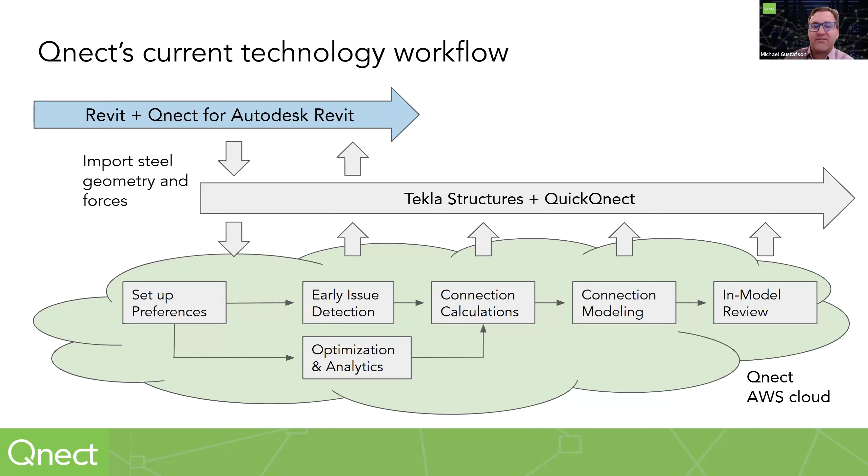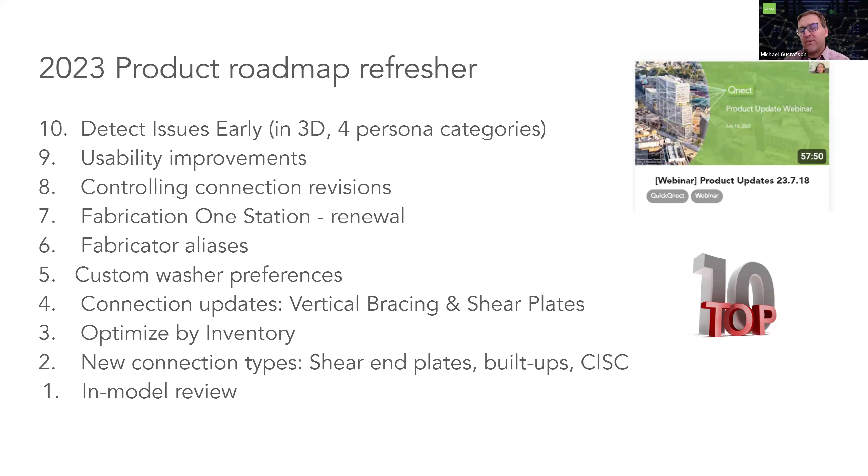A year ago, we talked about a top 10 list of progress. That was for the 2023 progress. If you don't remember or missed that session, we have that webinar up on our new video library for you to check out. I think it's always good to look at where we've been coming from holistically when you get these product updates.

One big theme that we've been focusing on, before we dive into the details of 2024, is balancing between standardization and customization. This is something we've heard from customers over the years. When QuickQnect started off first for Tekla users, there were a lot of perceptions, and probably some reality, around a lot of customization, but maybe not as much power to do standardization.

So today you'll be hearing about standard part tables or our mandated connections, estimating parts, new column optimization of doublers and stiffeners, and all those capabilities, how that helps framing and connections being optimized more holistically.

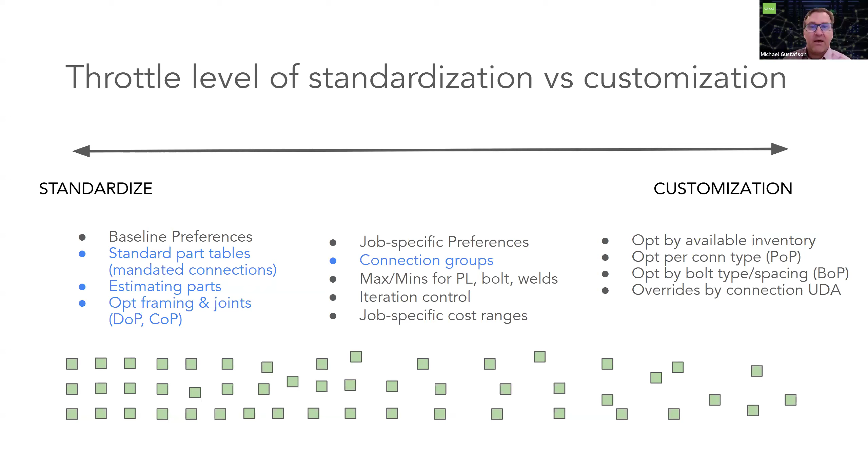And then on that middle one here, connection groups, this is really a very fundamental aspect I wanted to just double click on: the way that we're classifying connection groups, right? And this impacts how many connection types or groups you have. We're looking at two different levels of classification, both the framing condition, the types, and the framing format. That means related to the forces, and then also looking at the secondary-main and connection data.

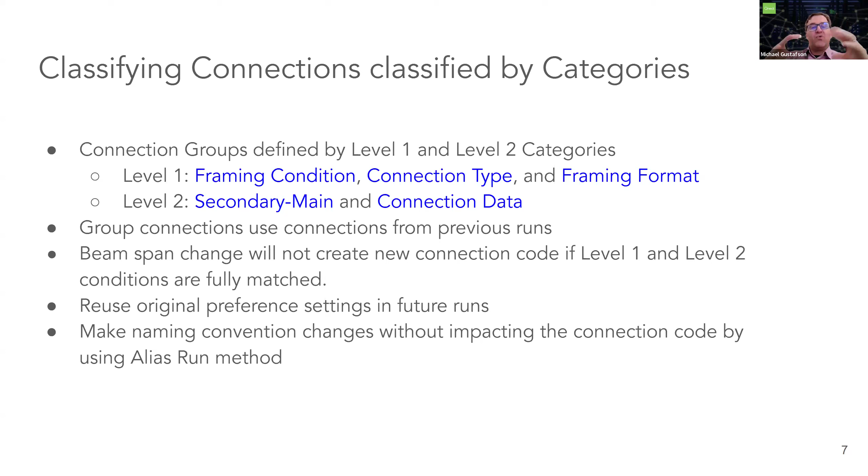We look back at previous connections. So if the forces are the same, or if the forces fall within that envelope of that connection, and all the geometry is the same, it'll use that same group. So when we first started many years ago, there was probably less of that grouping. Now we've been making it where there's more grouping, and that means there's one calculation for a bunch

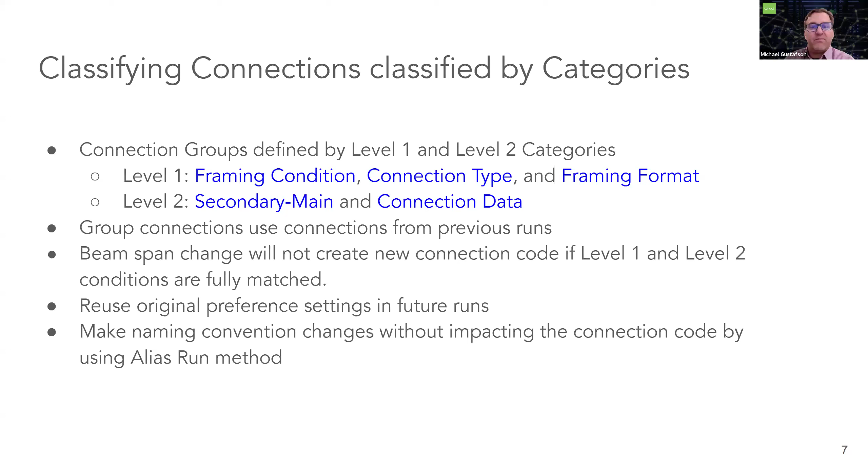of different groups. So I encourage you, if you want more data on this, we can share this with you, but we think that this is really key for you to be able to throttle between and make sure that you are getting a balance between repetition and customization.

So looking back actually for the last year, there's really three buckets of investment. I'm going to go through each of these three categories, but this is the high level overview. We're prioritizing more scope of connections, right? Our aspiration is ultimately to get 100%. That's obviously very hard to achieve, but the more we can automate, the more we can free up time for teams to focus on the problem solving, the customer facing aspects that are so critical to your business. So we'll be talking about the different connection types we've been investing in.

Then secondly, flexibility, being able to use our tools but get to the last mile. I think this has been a very important area for us to invest in, and I hope that you as customers can give us more feedback in this area. Getting that last mile: the automation can get you so far, but then last minute changes or being able to customize that one last connection. How do you do that at the UDA level, or being able to accommodate changes and allowing the revisions to happen? We'll see some updates here that I think are helping support that.

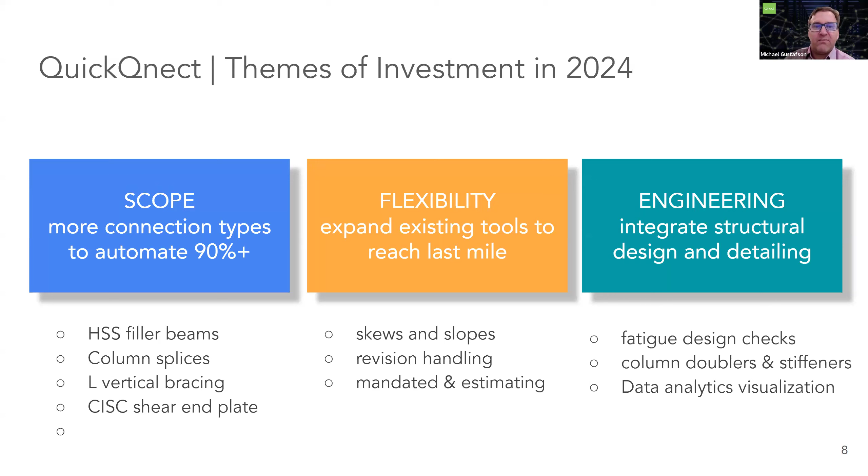And then the third bucket is around engineering, integrating design and detailing. We continue to invest in new calculation types or things that are helping the engineers and the teams better view and analyze their data.

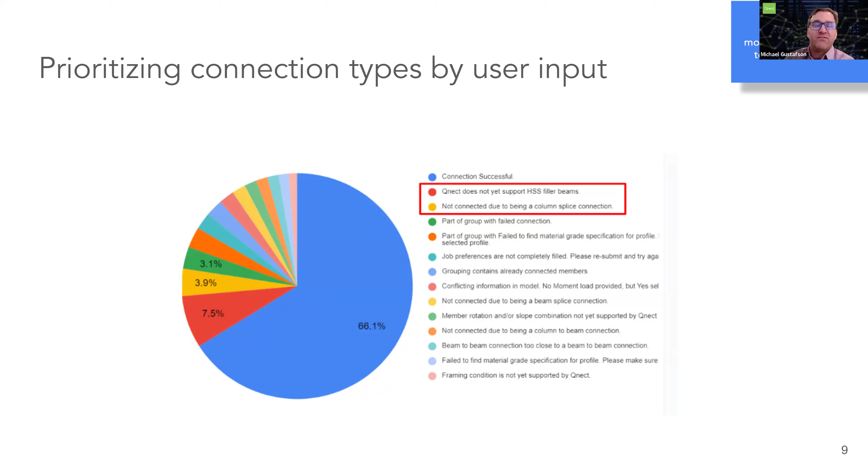So on connection types, I wanted to say first, our historical data: we did a while back look at all the different connection types that customers are running, and we saw that HSS filler beams and column splices were near the top. And so that means connections that didn't connect for various reasons, and that could be we didn't support these connection types, right? We did support some HSS framing conditions, but not that many.

So for column splices, we've now in the last year implemented gravity column splices. When I say gravity, these are really what's specified in table 14.3 in the AISC manual. And this is for typical column splices, no moment forces, they're not slanted, they're vertical columns. And we allow, you can see the details here, bolted flange plate column splice connections. So not welded or bolted to web yet, but this is our first phase of this, with lifting holes and all those details.

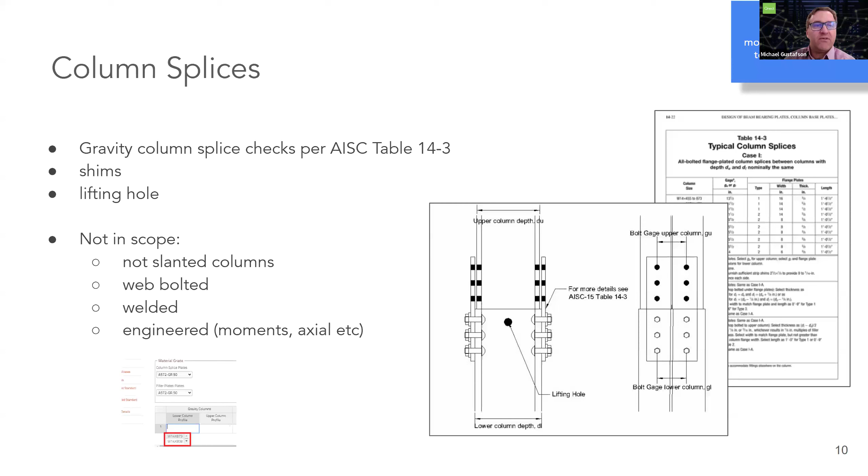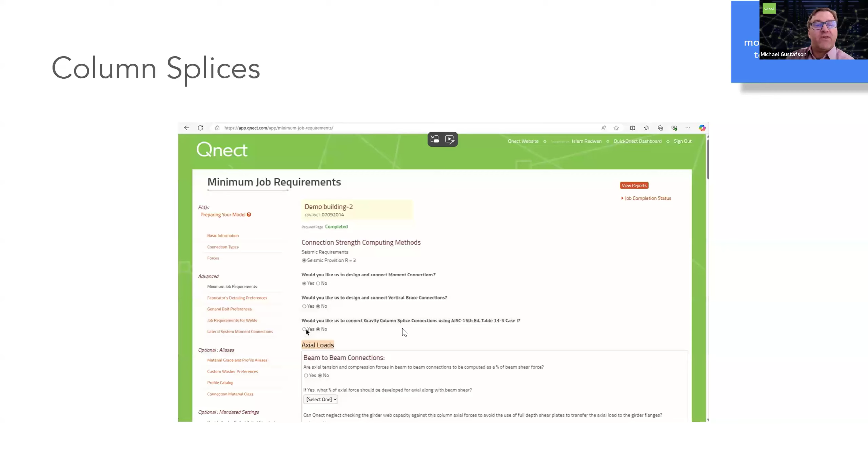So we're excited to have a first version of column splices here for you all to be implementing for your gravity columns, and we'll be posting this video on our video library, so you'll be able to go through this and see this video. But here in the interface, you can see where would you like to use gravity column splices. This is within the minimum job requirements.

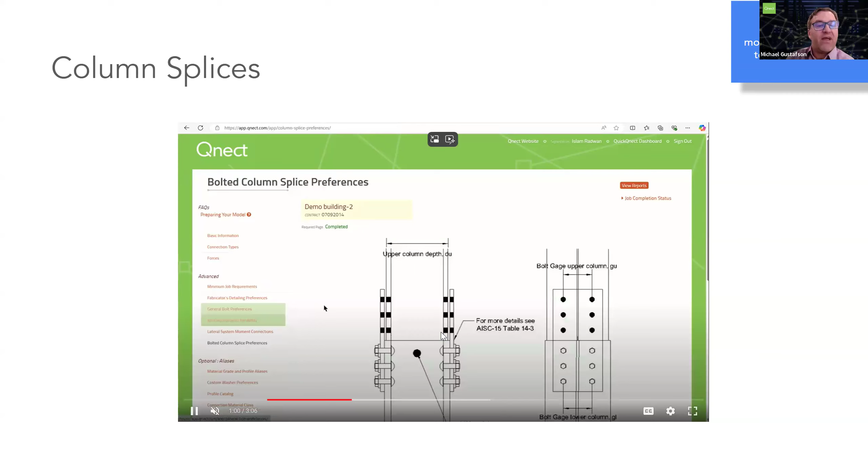Once you activate that to yes in the minimum job requirements, now you'll have it show up in the left under advanced, right? You'll have the bolted column splice preferences that show up here. So then in here, you can go in and start specifying your plate materials, your filler material grades, building out the framing combinations, right?

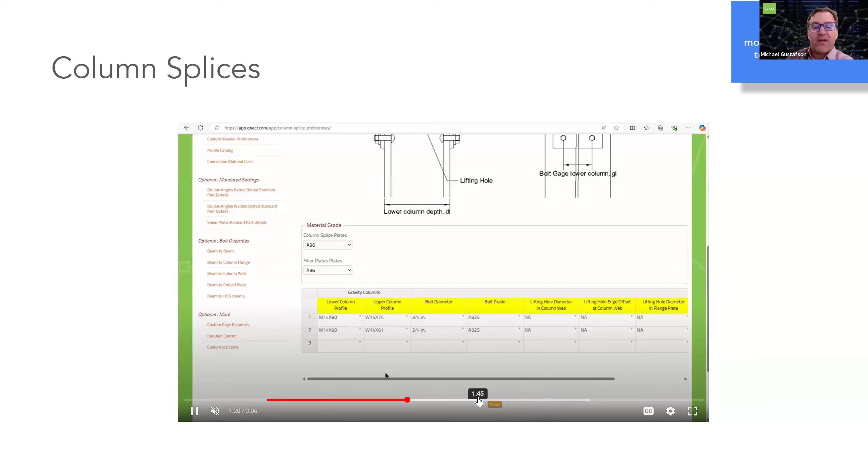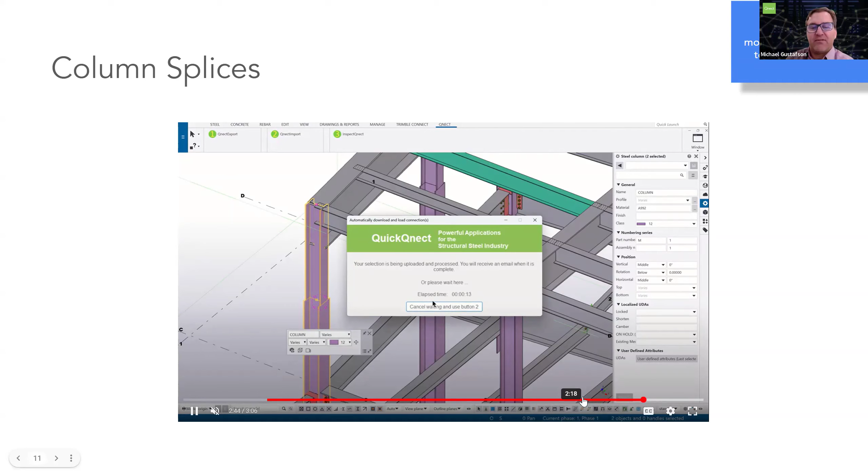The lower column, the upper column, and then all the various parameters that go with that. I'll just kind of fast forward through here. So once you fill out those parameters and those combinations, it will come in and apply that particular connection. We're very prescriptive with this, right? Because we're following that Table 14-3. We're not doing any calculations per se, because it's all prescriptive based on the code. So we'll look forward to your feedback on this.

So then the second implementation I wanted to talk to you about is on the HSS filler beams to wide flange support elements, both columns and beams. So here you can see three new types of combinations of HSS beams. So this is secondary beams where they frame in with shear end plates into the columns, both flange and web, and to beams. Remember, we already have W-shaped beams framing into HSS beams. That already exists. So this is adding to that existing combination.

So we're excited about this because, as you saw previously, this is a common no connect reason that came up from users needing to connect, whether it's girts or elevator openings. And there's a lot of those secondary framing into the primary framing that users are wanting to connect. So I say it's in beta. We're basically going through the last round of testing here. It will by end of the year be available. Just keep an eye out in our release notes for that update.

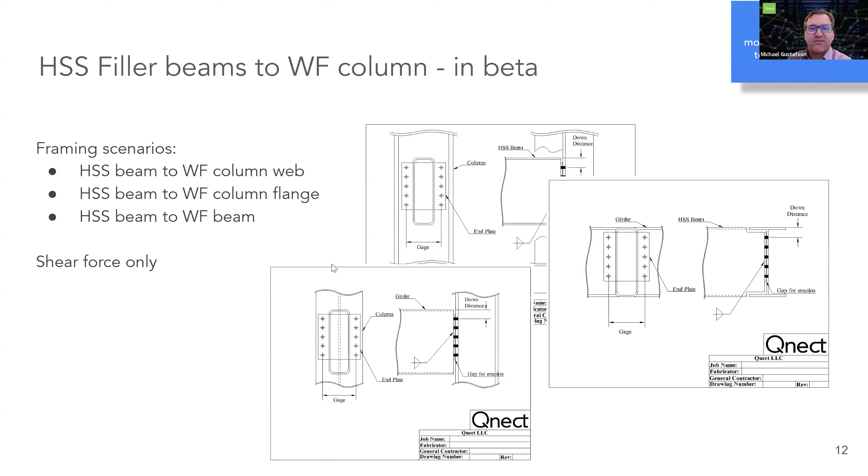So then number 3 with connection types is our single angle vertical bracing. You remember a couple of years ago we started the HSS vertical bracing. Now we release single angle vertical bracing. We're working on wide flange bracing next, but this is our single angle vertical bracing for both column flange and column web. I think a year ago in a webinar, we had the first release of the column flange. We've been enhancing the vertical bracing with column web capabilities. So we have a video online for you to take a look at.

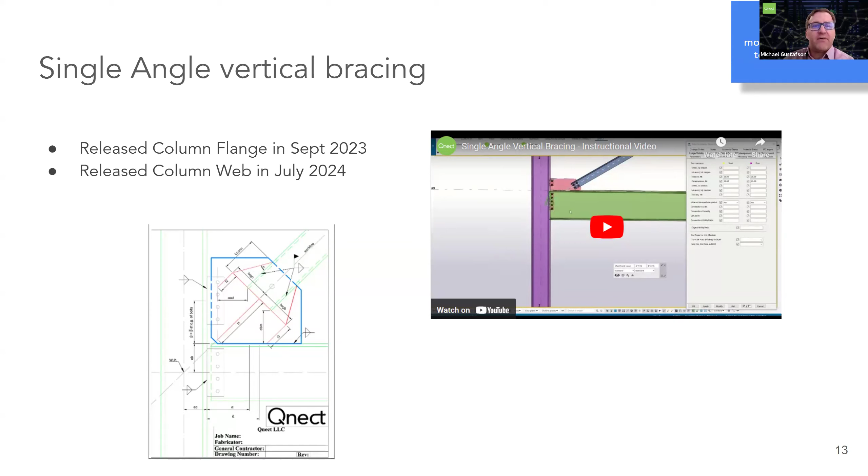And we know all these different bracing combinations are dependent upon, well, if you're the fabricator, of course, it's dictated by the EOR, but a lot of this is force driven, right? So some projects, maybe more industrial projects, we see the single angle vertical bracing. HSS is used more in building structures. We'll talk later on about the prioritization, the direction of where we're going to keep expanding on the vertical bracing.

Connection types for Canada, where we have customers doing Canadian code designs. Last year we expanded on the CISC to have all the clip angles or the double angles, the shear plates. So now we have added end plates, and this is actually quite a common connection in Canada. So for Canadian customers, this is going to be helping them with their traditional shear design.

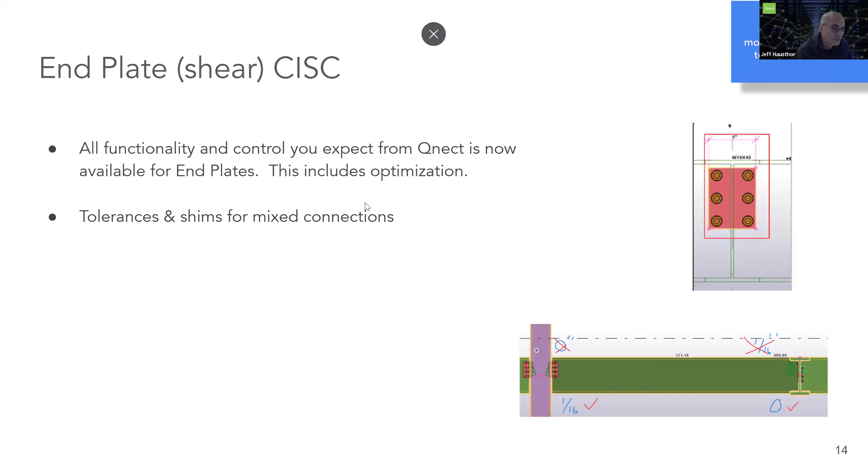And Jeff Hausthor, just to verify, is that shear plus axial, or how much variation do we have on the shear or shear plus axial with the end plates? Putting you on the spot here. No, it's shear only for end plates today. Okay. All right. That's good to know.

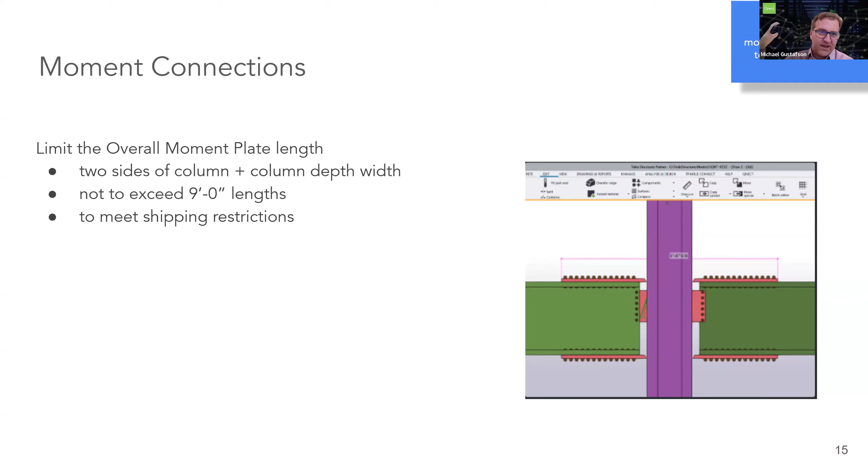All right, and then moment connections, we keep enhancing things. Here we added a limitation parameter around the length of the overall moment plate because of shipping restrictions, not to exceed 9 foot lengths. So if you have a column like this, a deep column or a heavy 14, and then you have long flange plates extending out, you want to keep that less than 9 feet for shipping purposes. So we're not designing beyond those capabilities.

All right, so that's on connection types, that first bucket of investment we've been doing. The second investment is around the flexibility to be able to go that last mile, and modeling and detailing capabilities are key here. The sloping, this first one here, I heard a lot of this feedback from customers over the last 2 years, and I'm happy that we've implemented it.

This is to do with increasing our slope tolerance. The slope tolerance used to be less, I think it was 2.5 degrees or so, but it's now at 5% slope, right? And we're not decoupling the forces at all. That's still using the vertical resultant forces, but that's the assumption we're making. And from the customers we talk to, that's acceptable.

So we're going up to 5% slope. And then the skews already go 5 degrees off the orthogonal. And then we do skew and slopes together too, right? Because you have conditions where you have both, with, say, roof situations or floors that are sloping and you need

skewing as well. Then with bolt clearances, more controls on being able to control the clearances on extensions of bolts, doubler welding clearances. This is from customer feedback on having enough room to get in there to actually weld beam doublers or column doublers. And then just more flexibility around beam flange corner cuts.

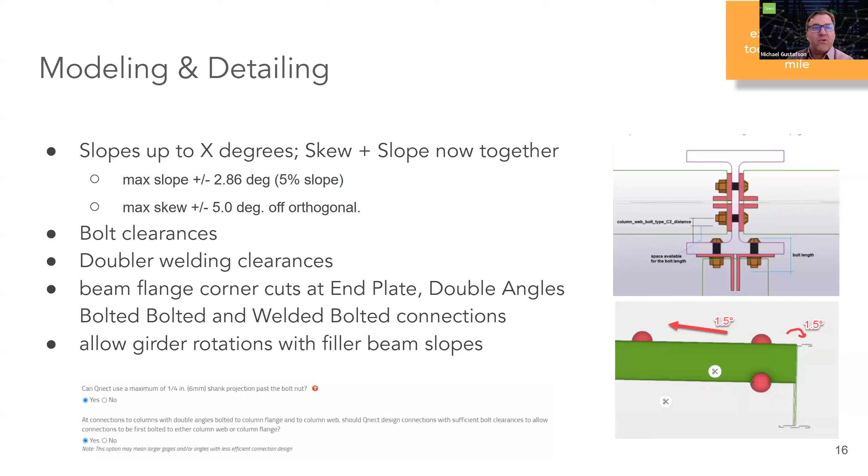Then for managing revisions, this was really a key feature that customers asked for: they wanted more flexibility on how to control or embrace model changes and how they impact the QNect calculations or trigger the modeling. So now we allow, with this listener feature, which is under the settings, that you can have the listener turned off. That means the listener will not be looking for changes in the model, right?

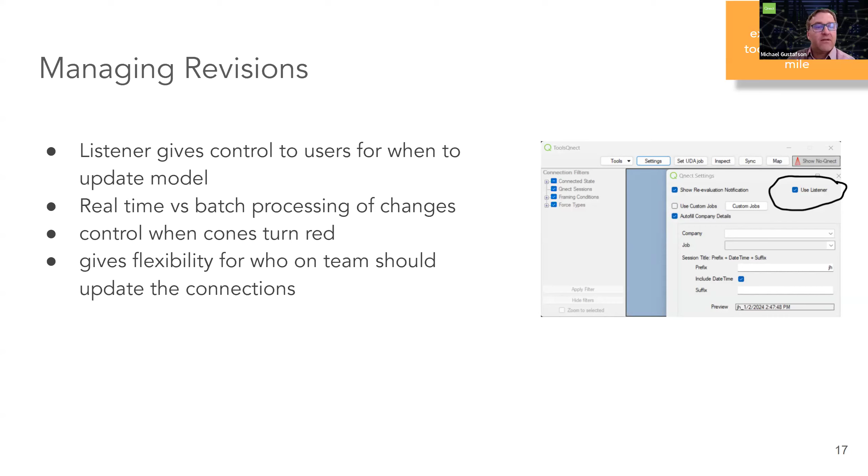So if you have it off, you can wait to turn it on later and basically run all the changes at once at a later time. Maybe there's a bunch of changes happening and you don't want those changes yet to propagate in the model from a QNect standpoint. This gives flexibility for who on the team should actually update the connections, right? This was, I think, implemented in the beginning of last year, and we've heard strong feedback on this.

So then in terms of more flexibility, the next few slides are going to talk about enhancements to our standard parts and this new estimated parts. I wanted to first frame this up in terms of how we are now allowing teams to model and design their connections with a hierarchy and greater flexibility, right? Years ago, we actually did not have standard parts. We started where we just designed all connections based on the preferences.

Then a couple of years ago we implemented standard parts, where you can set up, say for a clip angle or shear tab, and explicitly call out all the details that you want: the bolts, the plates, the welds, all that information for different framing connections. Think of it as an auto connect on steroids within Tekla. Standard parts is the first step that we look at when we're running the design and the detailing. Then the engineering and detailing, which has always been there, is looked at secondarily.

So for any connections that can't be met by the limit states, it'll run through all the other detailing preferences that we have. And then the last step is the estimated parts. Now, within our software, we have at the beginning of the job standards three different modes that you pick. Do you want the full detailing and design mode, which is the traditional one users have always used? And you'll see these two new modes of detailing only and estimating only.

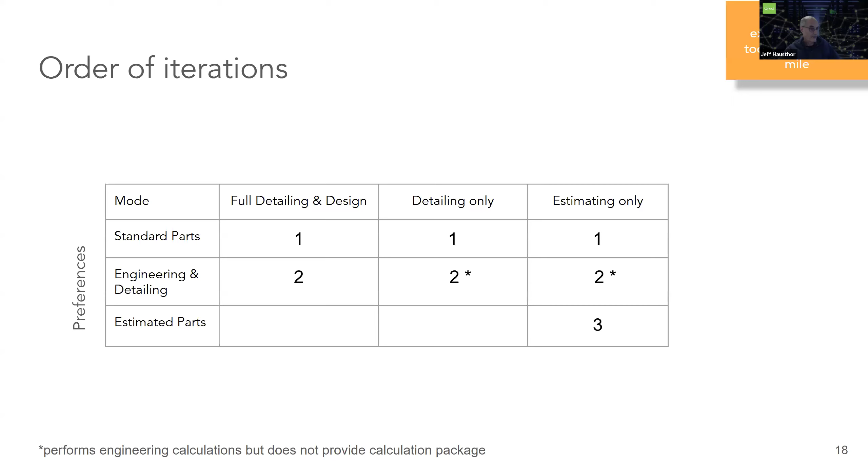We're not checking a lot of things in detailing, like if there's any clash, but it allows you to put in an estimate where you can actually count all the steel and bolts. So you can imagine for estimating, it's all about speed, but using your even more conservative estimates the way that you do now. You haven't yet done full connection design, but that's okay at that point.

And we think this over here on the left, this flexibility of one and two, where you can use your standard parts as far as you go, and then we'll come in behind there with our engineering and detailing to validate everything. So that's a nice combination back to that big picture about standardization versus optimization. I think this 1-2 combination is a great way to balance that, and you have flexibility in how to push and pull on those two approaches.

This is quite new to QNect. I think a lot of users just haven't really explored it, or you saw the standard part details show up, but I hope this discussion helps you understand how to fit it into your workflow, because it's going to give you much more flexibility in how you work.

So on the standard parts, what we've been expanding there is we added also bolt row overrides. You can see that over on the right, just adding more capabilities. This enforced connection, yes or no, is customers asking for this at the connection scenario. So for a given standard part, say a shear tab framing in W8s to W10s or whatever that combination will be, you can flag it to stop. So if it's set to yes, that means enforce the mandated connection. That's it. Don't do any more. Don't try to find a solution.

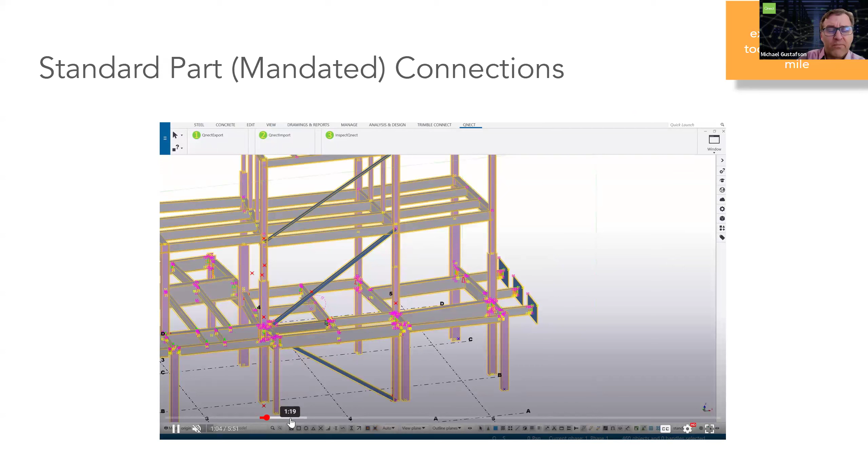So to activate this setting, you set it up within your minimum job requirements, and then you need to fill out the settings. And then this is a quick video. I probably won't play through the whole thing. Let me just fast forward. But here, just showing you where this shows up in the interface so you can see the mandated settings.

We, by the way, redid the menu on the left here so that it's more logical, like the names, and grouped things into the same groups like bolts and welds, the way that would make more sense. But yeah, all our mandated settings are here. You can see examples of picking the different framing conditions. It can be for specific members or families, like W16s, the W24 shown here.

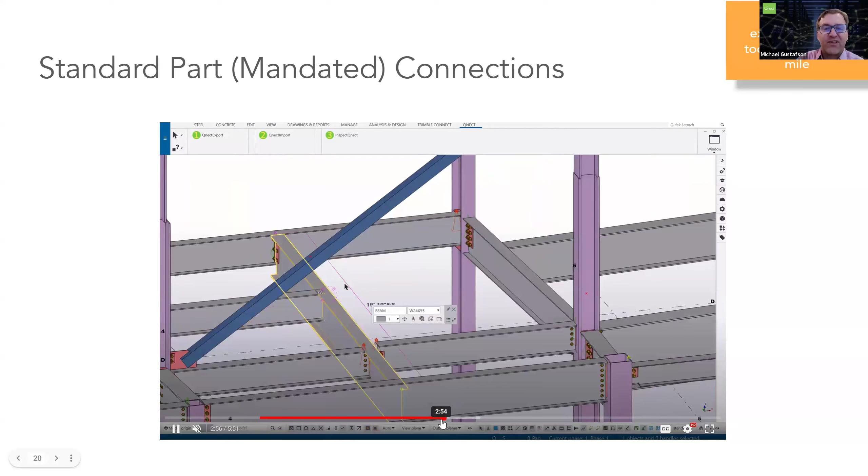Let me just scroll over. Oh yeah, and by the way, to show you here, with any of these tables that we have, you can copy and paste from Excel or from row to row, to kind of work through that.

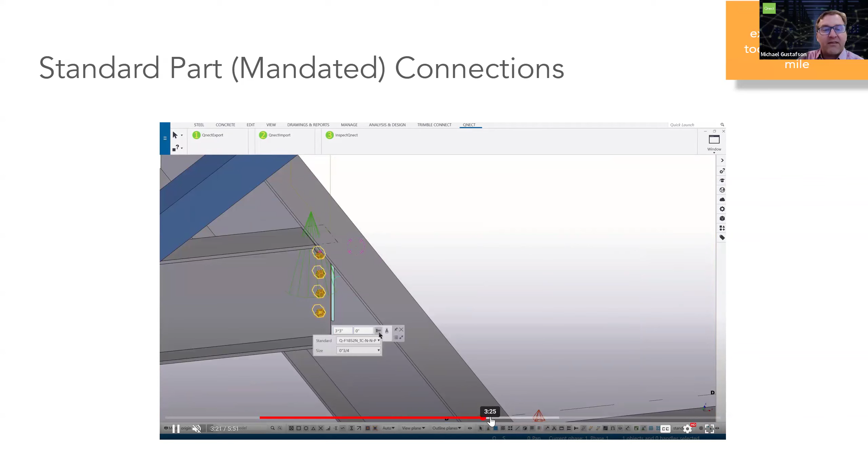So this video just goes through and shows that image I was showing on the left graphically before. This is where we put in the connection, where the setting is for a given, say, I think 40 kip load. This is the first connection, and it's got just four bolts in it.

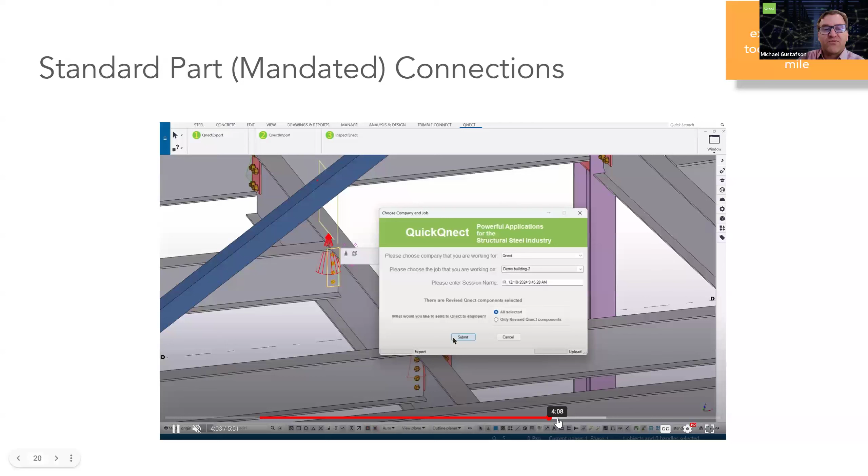So then if I just fast forward, I'm going to increase the force from 40 kips to 90 kips. Okay, so 40 kips to 90 kips. And then we run it, and here the setting is set to, I think, tell it to continue to optimize. So this is where the enforce is no.

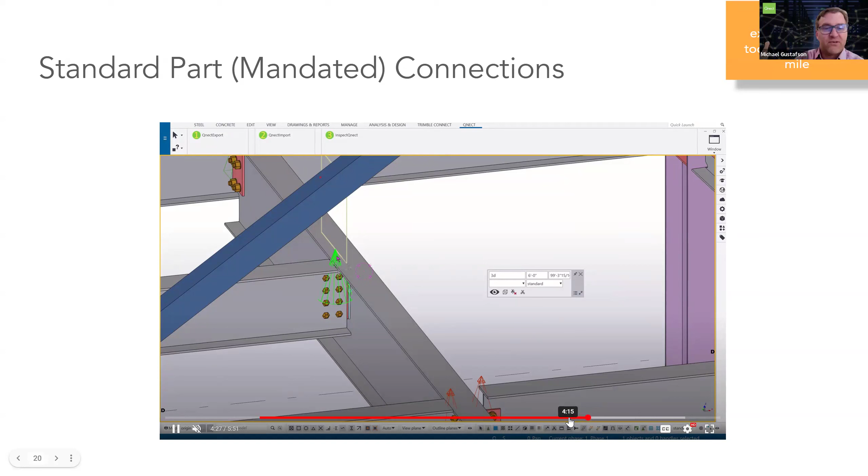So we're not enforcing it. So it'll go from mandated, and then if it doesn't work with mandated, it goes to step 2, which is our detailing and engineering preferences, which say, yes, go through looking for multiple rows of bolts or whatever strategies to design this connection. That's what we've gone ahead and done.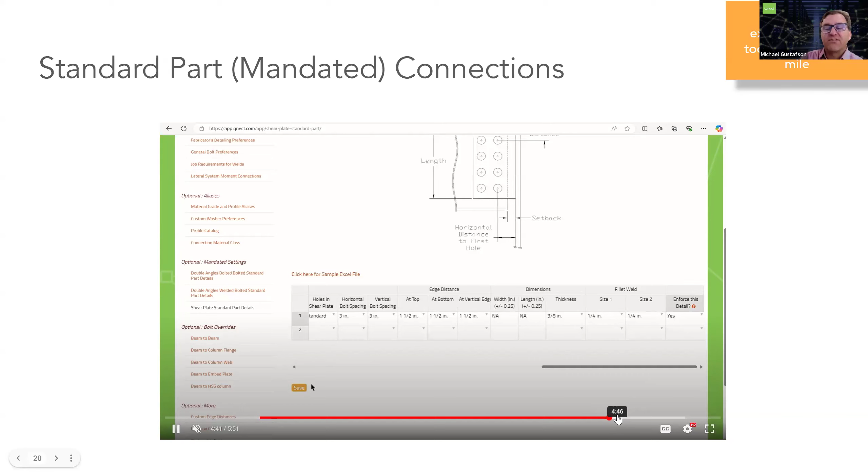All right, so then you can say, okay, I want to actually deactivate that. And this could be in the early stage of a project. We were talking to a customer who said, I want to run my mandated first, early, and just see what doesn't work based on my company's standards. So whether that's an engineer's tables, or the fabricator has certain standards, I just want to run everything and let me know what works and doesn't work.

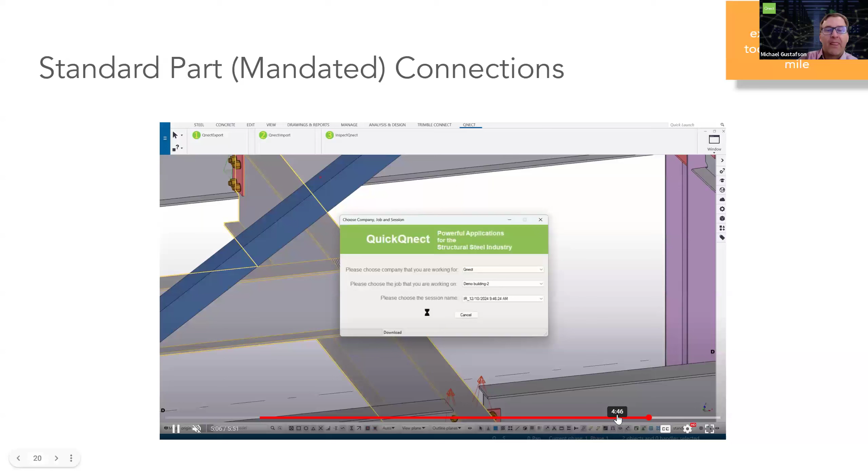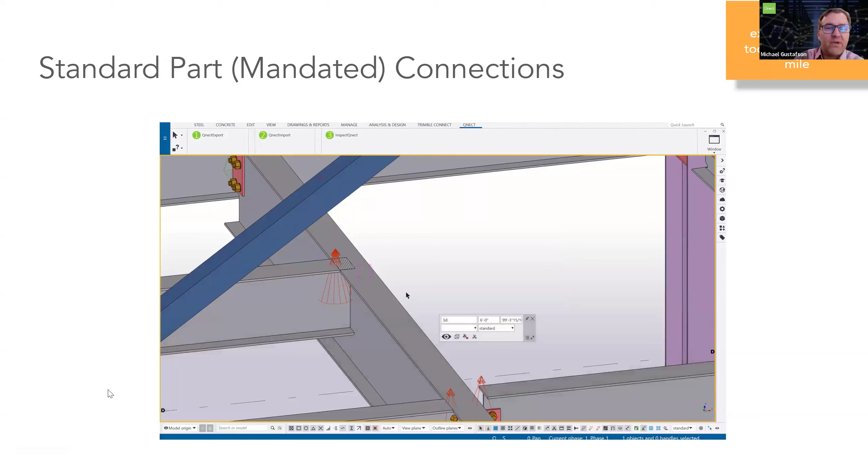Green cones, red cones. But then when you find the red cones, you can say, okay, now let QuickQnect go through its optimization and its other preferences to make those work. And these connections all have data on them, so you can filter them in Tekla, isolate them, view them, and flag them to quantify them based on what's mandated versus what's really delegated. So that's a quick workflow on mandated and how to put that into place.

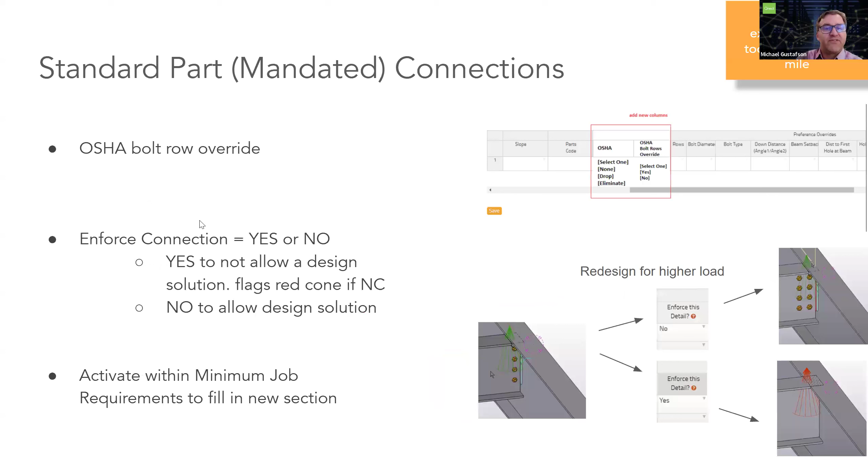Then on the estimating, these are really the steps to set up. If I go back to that previous slide here, remember with estimating, it's going through standard parts, the engineering and detailing, and then third, the estimated parts. So you still have to set up your engineering and detailing preferences because that was step 2 that it was trying to do. And then step 3 is the estimated parts table.

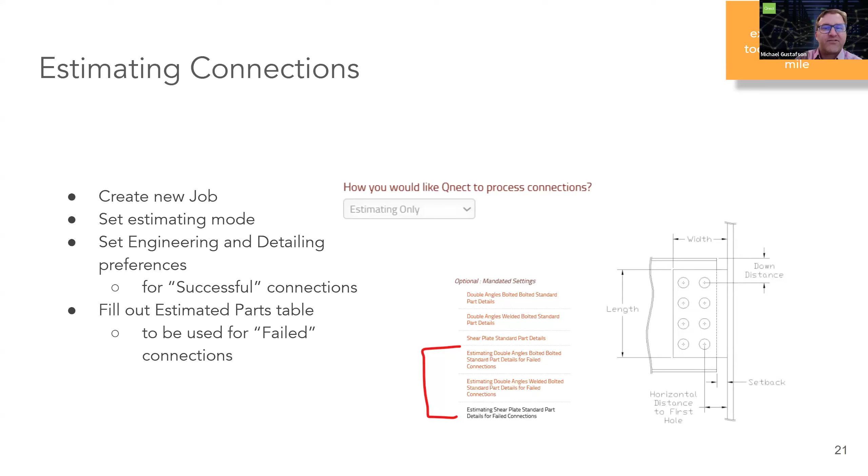You have a new table where you can add those connections that we're not running the calculations on. It's the auto connect with no calculations associated with it, and we're calling it estimated, for the connections that failed. But that'll, as Jeff said, get you that extra 10%. Say you connect the model 85%, if you can get to 95% for estimating, that's a big win.

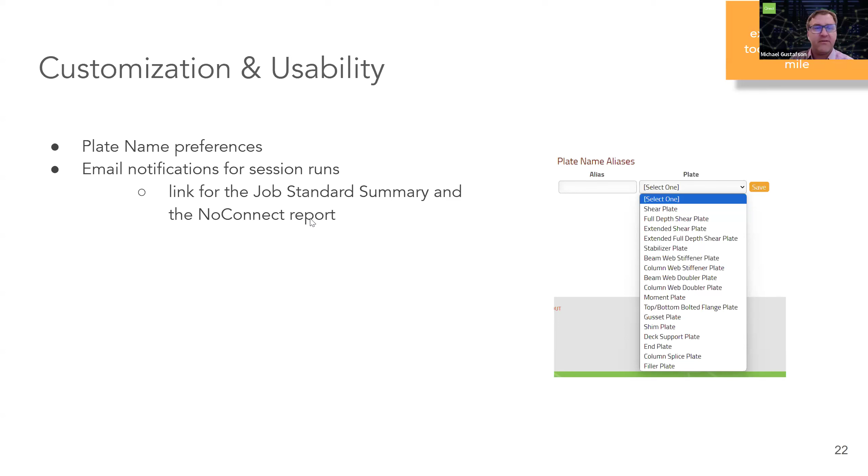And then our last couple of slides on flexibility: we invest in usability, customization, aliases, defining what the aliases are for different types of plate material. We're also sending notifications for session runs. Before, we didn't have the job summary and the NoConnect report together, but now they're all in one place. And then the usability of the preferences: I mentioned the reorganization of the tree at the left. That is helpful for new users too, to get familiar with how to use our software.

Okay, so then we're moving to the third bucket of investments, and that's around engineering. We implemented fatigue loading. This is based on a customer project where this was really critical for a building project. But it actually uses the bridge LRFD, AASHTO 2020 codes. We're doing this for shear plates, shear forces only, looking at very specific criteria per these codes. What's interesting here is it's doing the normal limit state checks, but also these additional fatigue checks for these gravity connections.

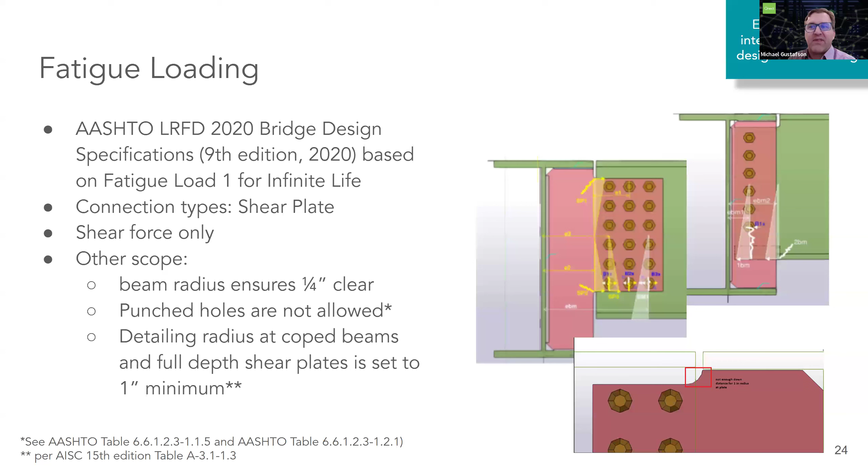So if you have any projects coming up, it could be structures going over a highway interpass, or something where you have traffic that's driving, that has to be designed with steel underneath a mixed use project, we have this capability that may meet your requirements.

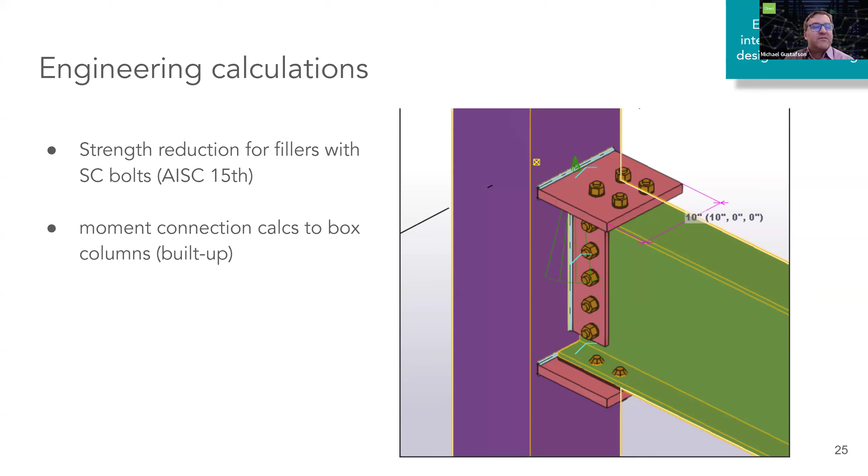Then we also have made updates to our calculations for moment connections. We do the moment connections for built up box columns. So if the moment connections are connected to a box column, which is a built up parametric shape, we're able to do that moment connection calculation just like if it was a wide flange beam. We also have implemented the strength reduction for fillers with slip critical bolts, and that's per the AISC 15.

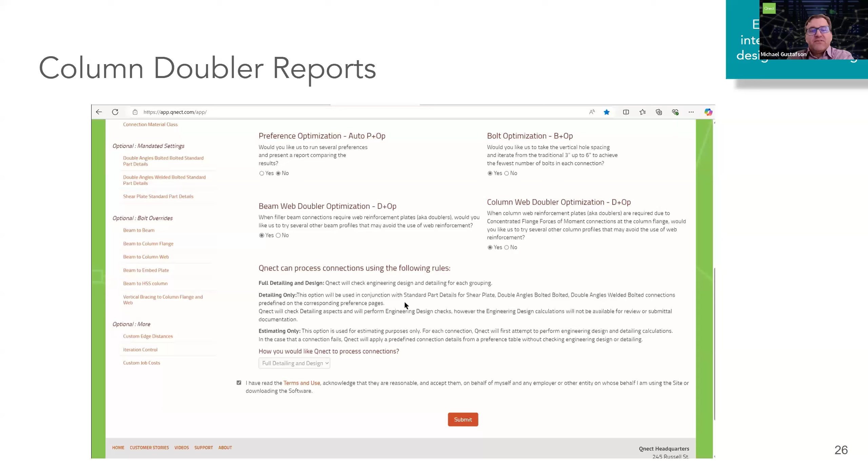And then this is one of my favorites in terms of engineering, because I know as an engineer, you try to design your framing efficiently, right? But there's always these inefficiencies. And so when I worked at AISC as a regional engineer, this is an area we were trying to help train up engineers on: how do you balance adding stiffeners and doubler plates for moment connections versus upsizing columns, right? And what's that balance?

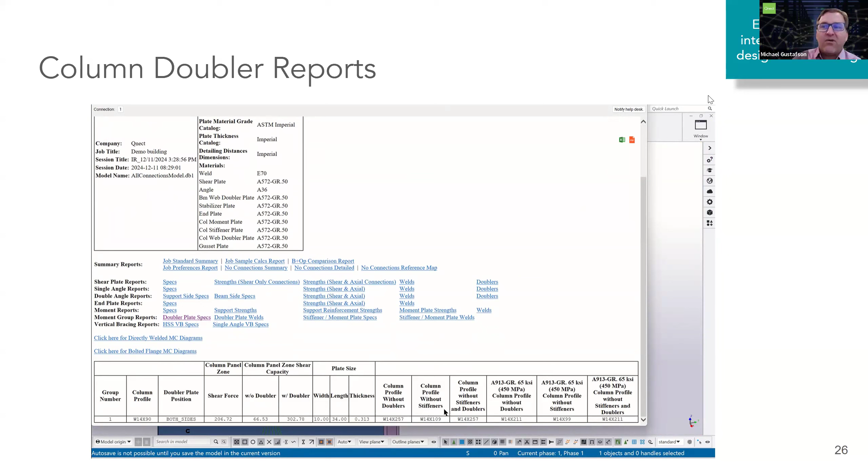So, well, now in QuickQnect, we run this optimization for each of the joints where there's moment connections, and we actually give you proposed options for the column profiles. And this is based on equivalent section modulus depths, right? We're not doing some finite element or anything in the background here, but we're giving you equivalent column weights and capacity options here, both for 50 KSI and 65.

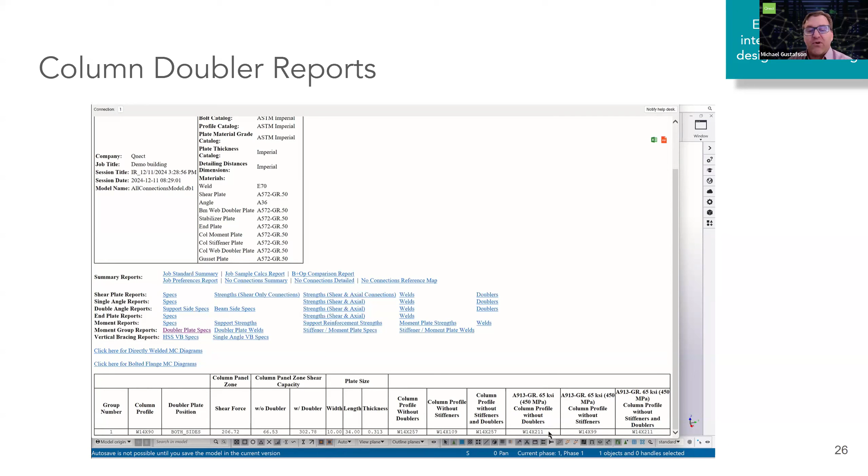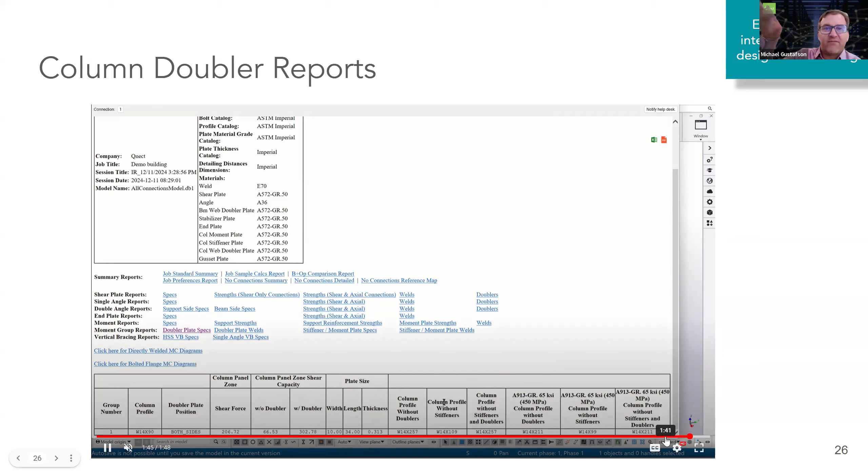We know there's a trend towards 65 for columns for sustainability purposes. It helps reduce costs on projects. So we're giving you the sizes for you to eliminate the stiffeners or doublers or both, right? And so what I'm showing here as a workflow is kind of at the one level. You, of course, can run reports. Like if you have a bunch of column doublers in the model, we have on our website the QuickQnect reports, doubler reports, and you can run a list for the entire model.

We think this is interesting for the future, because this same capability that's in Tekla will come into Revit as well, which is going to be super valuable for Revit users. And then also visualizing engineering data. Users were always able to run their own analytic reports, but it was very text heavy, like with the reports that we have, to be able to compare connection type combinations with bolt pairings and looking at number of bolts saved.

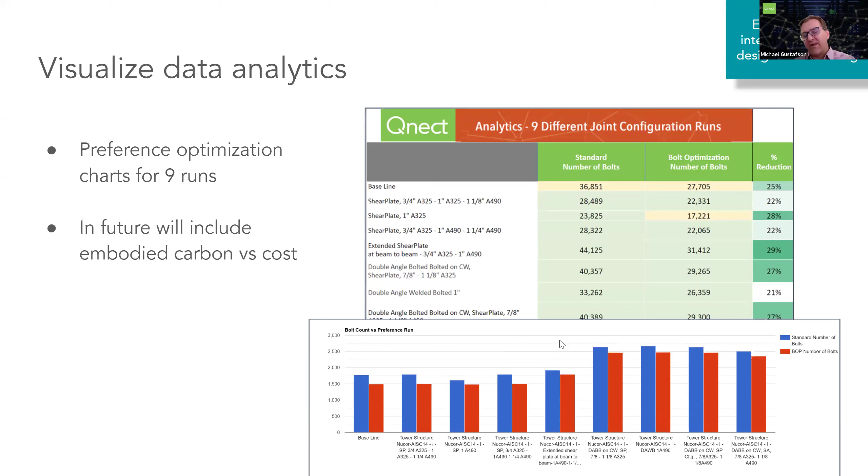Well, now we're able to visualize that, like bolts saved, cost. If you have the costing data, you can have that data. In the future, we'll be looking at cost and carbon together using the same type of framework, but starting to build these reports on our visualization charts on our website, I think, will help you make faster decisions on what connection strategies and bolt pairing strategies to use.

So that's kind of a summary. In 2024, we think we've made some great headway in addressing scope, flexibility, and engineering. Looking forward, some of these are just ideas at this point, no commitments, but we are working on wide flange vertical bracing. That is actually happening now. We are exploring what other vertical bracing combinations.

If any of you have a strong opinion, put them in the chat here. We've been thinking about chevron bracing, or bracing at the base plate locations with the existing vertical ones we have, or horizontal bracing. We think these are all important. It's about priorities and hearing from customers what's most important. Second, on revision management, I think the more we can do with revision management to let you get that last mile, that's very important.

Usability, we're looking at 3D visualization of connections before you get into Tekla, and before you even get into Revit too, as a way to visualize the connections, and that could help you with making your decisions. And then engineering wise, we're working on comparing cost and carbon data because embodied carbon reduction is becoming more important. Moment connections with shear plus axial, just exploring how important that is. More QC checks for EORs, things that help engineers make their models more constructible.

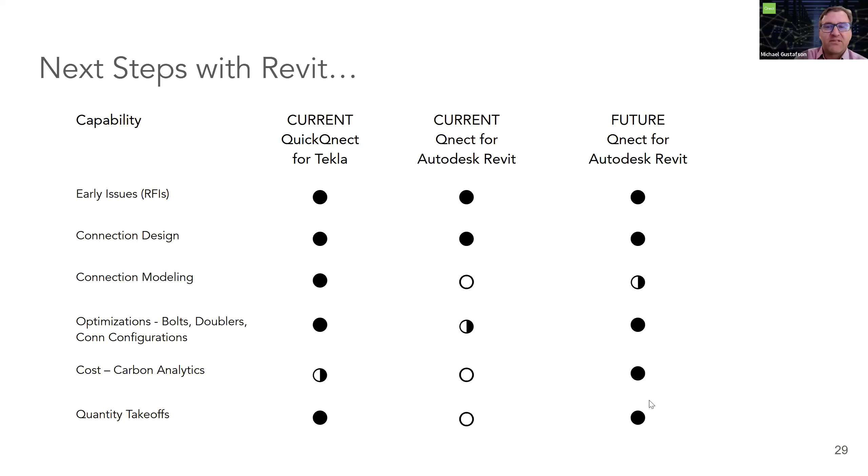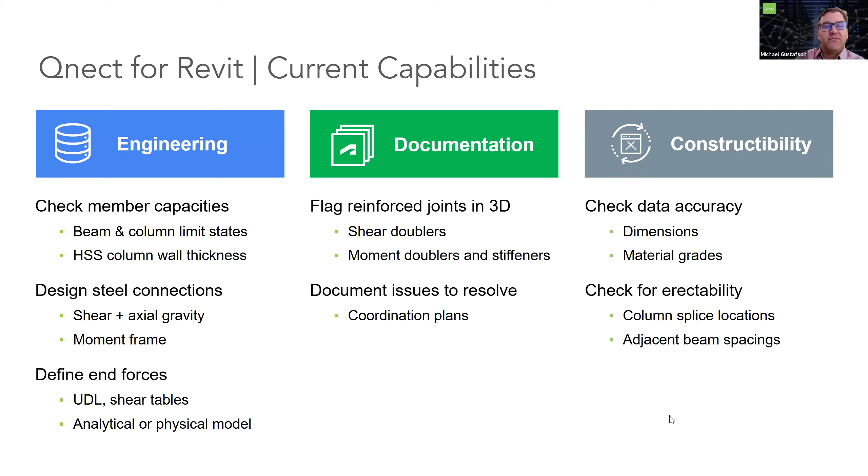And what we have today with Qnect for Revit, focused on issue detection, it's really two things. One is finding reasons why connections or framing can't be connected, why the connection designs or detailing don't work. And then secondly, if they do work, identifying where the complex reinforcements are. So per the Code of Standard Practice, engineers need to be documenting those complex joints on their drawings. And so this tool is helping them do that by identifying those locations.

And so in the future with Revit, we see these things we're doing with QuickQnect actually help the Revit workflow: HSS, more HSS combinations, connecting to embeds. I mentioned moment plus axial, and usability of the tool, how to visualize the no connects in an easier way. And drawing maps, like we have in our QuickQnect today, you can create drawing maps, which is great for Tekla users. Well, that same ability to visualize connection codes or locations of doublers on plan drawings, that's all very possible with Revit because all the data already exists, right? We just need to annotate it on a different drawing platform. So that's where we're going next.